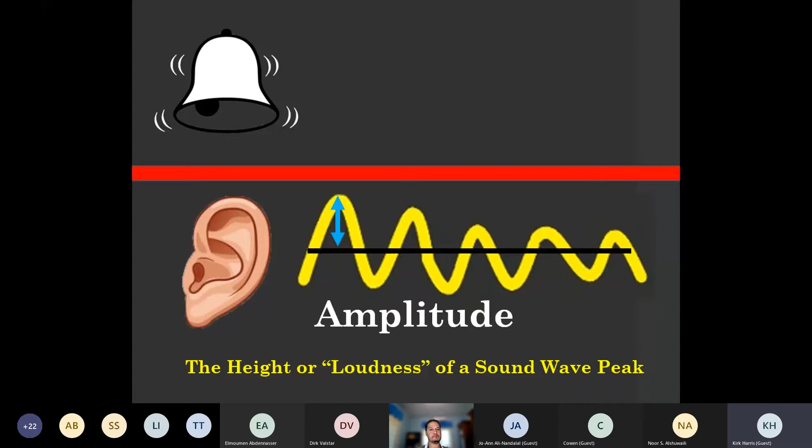It's electrical energy. When that sound wave comes back, it hits the transducer, also a piezoelectric transducer, and that compression creates electricity and sends it back to the truck up the wire line.

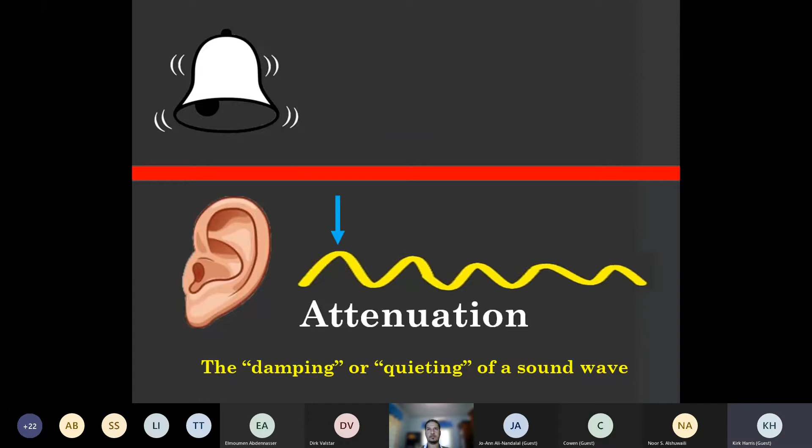We also have attenuation, which is the damping or the quieting of a sound wave as the sound gets not as loud. It's probably better shown like this. The sound wave goes out, and when it comes back, it's not as loud. The amplitude is lower. We can actually calculate attenuation of the distance and the differences between the amplitudes where they're measured. Attenuation is kind of the opposite of amplitude. It's how much an amplitude is lessened or quieted. So a loud or a large attenuation is small amplitude.

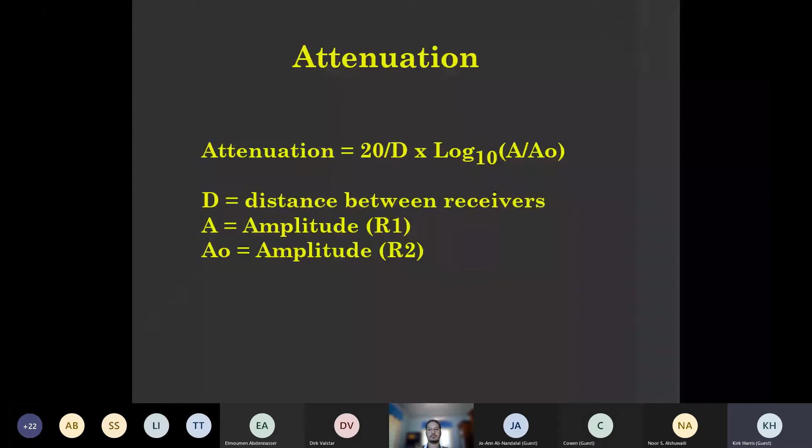The other thing we want to look at is resonance. Resonance is the lengthening of a sound wave, either reflection or echo or vibration or reverberation. It's when you keep hearing it. When I ring the bell, I hear a loud ring, but then I hear the trailing vibration of sound. That's resonance.

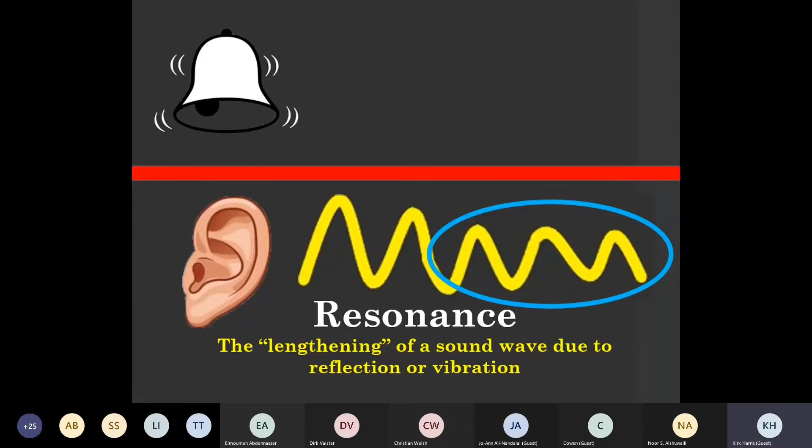We will not talk about the ultrasonic tool too much. We could spend days on all of the tools and on bond log interpretation. But the ultrasonic tool uses resonance very effectively to determine if we have a good cement job or not.

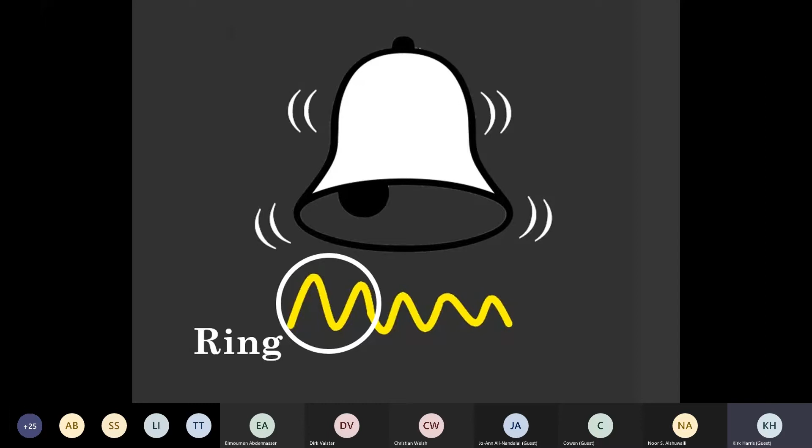So we have ring. You'll hear me talk about ring. If you go out to a rig site and you tap on the casing while it's sitting on the casing rack, you'll hear a ring. I mean, it's metal. You'll hit it and you'll hear a bit of a ring. Not like this glass I have here or a bell, but you'll hear a ring. And then we have the resonance. We have amplitude, the height of the wave, and we have attenuation, the damping of the wave.

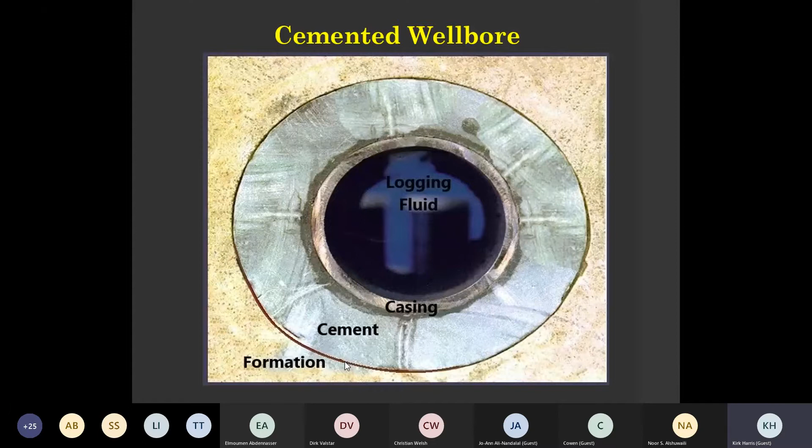So now it gets a little more complicated. We send the sound wave out, and we get a reflection off of the steel. It goes by Snell's law. When a sound wave or a light wave hits a boundary, the more alike those boundaries are, the more the wave will travel through. So two solids together, cement and steel, the sound wave travels through the steel into the cement. If there is no cement there and it's steel and water, a big difference in properties, then a lot of sound is reflected. And it's reflected down the casing. So what we receive is a very loud signal.

It gets worse than that for a cemented well. And this is what makes bond log interpretation so tricky. We send the sound wave out, we get reflections off of the steel, reflections off of the cement, reflections off of the formation. They all come down, they join together in a composite wave at the 3-foot and the 5-foot receiver. And now we get not just the formation signals, we get reflections and refractions and signals down the steel.

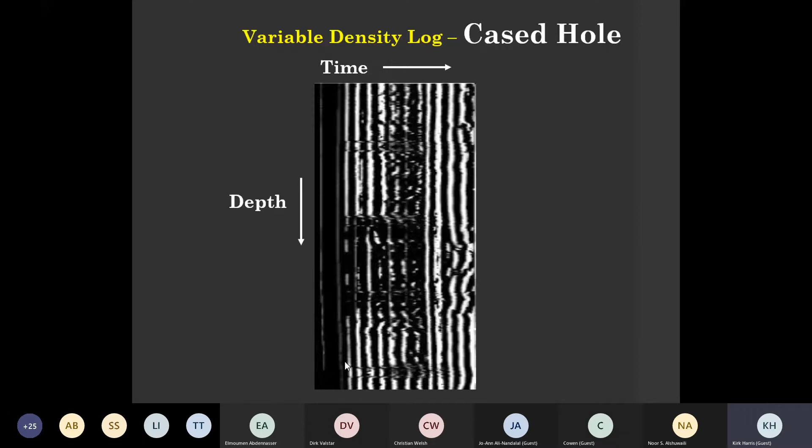And this is the log we get. We now get straight lines. Crooked lines were good. We were attached to the formation. Straight lines are bad. That means the energy did not go out. The energy is traveling down the steel. And if the energy is traveling down the steel, that means there wasn't a good solid outside that casing to send the sound wave out. Straight lines are bad. Crooked lines are good. Straight lines will distort crooked lines. They will cover, they will hide, and it makes it very difficult to see.

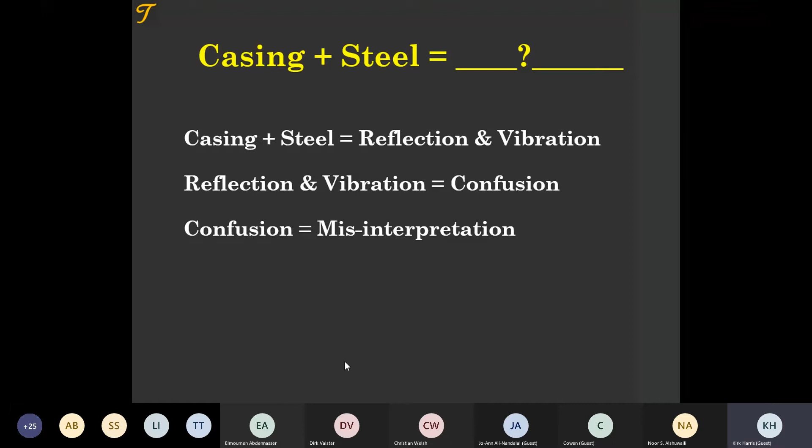This is my formula of cement plus steel. Cement plus steel equals reflections and vibrations. Reflections and vibrations equal confusion, especially a lot of straight line reflections. Confusion usually leads to misinterpretation. So the answer to the question is cement plus steel leads to misinterpretation. It is estimated that we misinterpret 50 to 80% of all of our bond logs. And I'm going to tell you, as we look at interpreting, I don't think we hardly ever interpret the bond log correctly when we have a marginal or a confusing log. It's very difficult, and I'll explain why in just a bit.

I was looking on LinkedIn today because I made a couple comments. A couple bond logs show up on LinkedIn, and everybody comments. And I made some comments that may be right or wrong, but I look at all the comments and there are a lot of opinions on how to read a bond log. And not everybody can be right because a lot of the opinions were very different. And so we're going to see a lot of misinterpretation if we don't have a method, if we don't have experience, if we don't have understanding.

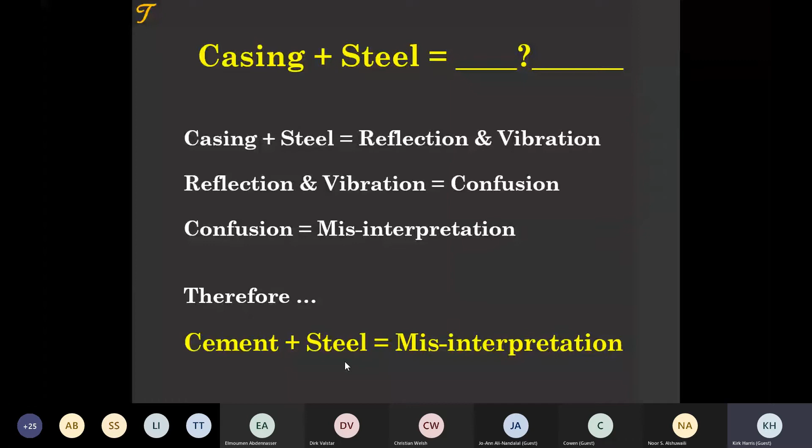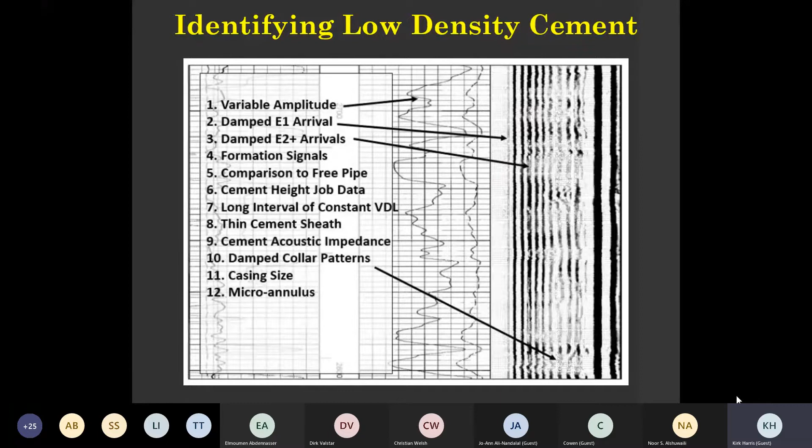I'm not going to show you much of this. This is a lightweight cement or a low density cement. Bond logs were made for normal cements. They were not made for some of the cements that we now pump. And so we see straight lines. That's bad. We see some crooked lines. That's good. We see some early attenuation, some late attenuation. That's good. It is hard to interpret lead cements sometimes. And I just put this up here to show that it's not always just a snap of the fingers and easy. There's a process that we go through and things we look for and things we consider when identifying low density cements. If we're doing a full training, we would go through 2 hours of how to interpret low density cements. But let's look at the basics.

This is the bond log. It has 5 curves. That's it. The first bond log I looked at, I thought it had 400 curves. That's what it looked like to me. This is very simple. You have to keep interpreting, but the log itself is simple. We send out a sound wave and we listen for it. The dark line is the gamma. It's just measuring the natural radiation of the wellbore. So it's giving us some formation changes, shales versus sands or limestones, for example. That dotted line right next to it, do you know what that dotted line is?

And we have many logs. This month I probably looked at 10, 15 different types of logs. So we get all sorts of different displays and logs, but this is the basic.

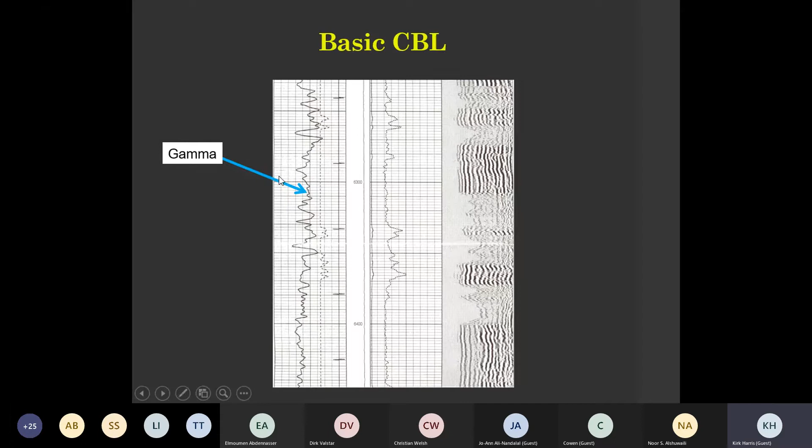This is the transit time. It should be straight. It's measuring the first wave that we hear at the 3-foot receiver. How long did it take to get there? And if it's traveling down the steel, steel is homogeneous. It's the same steel. It should always arrive at the same time if our tool is centralized and our fluid inside is the same, our steel is the same, our casing, that should be straight. We use that as a quality control.

We have our casing collar locator, which is basically a magnet picking up the massive steel at the collars, tells us joint to joint. Then we have the amplitude. In a slide or two, I'm going to tell you we do not use the amplitude to interpret. We can refer to it. It will help us, but we cannot just look at the amplitude and say good or bad. We have to do a little more work than that.

We have a saying at ThoroughBond, and that is, if you look at the amplitude for more than 5 seconds, you have to slap yourself. And you have to slap yourself hard enough that you'll remember slapping yourself, but you have to slap yourself hard enough to look at the VDL.

Now, the amplitude is the height of the wave of the first arrival. That would be a first arrival over here, but it's the first arrival that occurred at this point, and we measure it in millivolts, usually 0 to 100. This is very low. And so we have an amplified amplitude, which is 0 to 10. Same curves, just different scale. The VDL, if we were to pick up this amplitude, would be the arrival that comes in first, right here. But our amplitude on this log is so low, you don't even see it. It's a straight line that you can't even see.

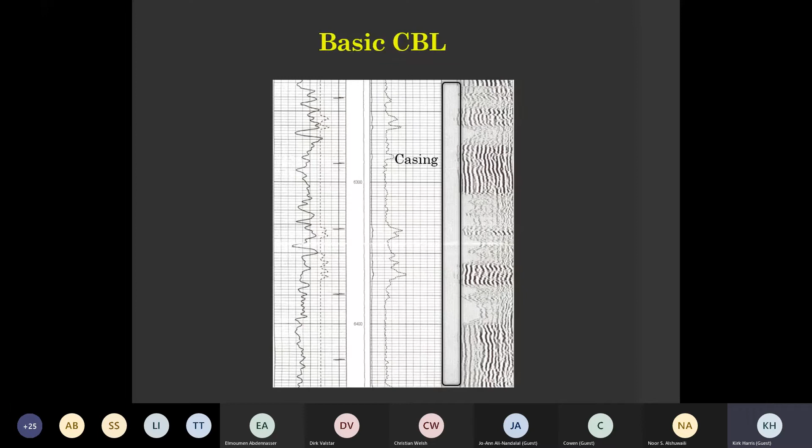And then we have the VDL. That is the formation. The VDL is made up of arrivals coming down the casing. That's those straight lines. First thing we hear, sound traveling down the casing. That's the casing ring. We have the formation arrivals. The formation arrivals are those crooked lines as we go from fast to slow formation here. At the end, we can pick up the fluid arrivals. Fluid arrivals are traveling on the inside of the casing next to the logging tool. It's going through a slow fluid since sound travels through fluids slower than the solids. But sometimes they'll show up and confuse us or distort the picture.

Do not use amplitude to interpret the CBL. I can say this now. I'll say this one just to be a little controversial. I don't mean to sound mean here, but there are 2 people who do not interpret logs very well. I could say 3 people, but for your oil company, you have someone who is probably the cement bond log interpreter. And I don't know their background, but cementers usually don't interpret the CBL. I wish they did. And when they do, I know some, I think they're very good at it. But often we don't get involved. We leave that to logging. There are some logging engineers who can interpret. They're practical logging engineers. They understand that there are limitations to their tool and they know how to interpret.

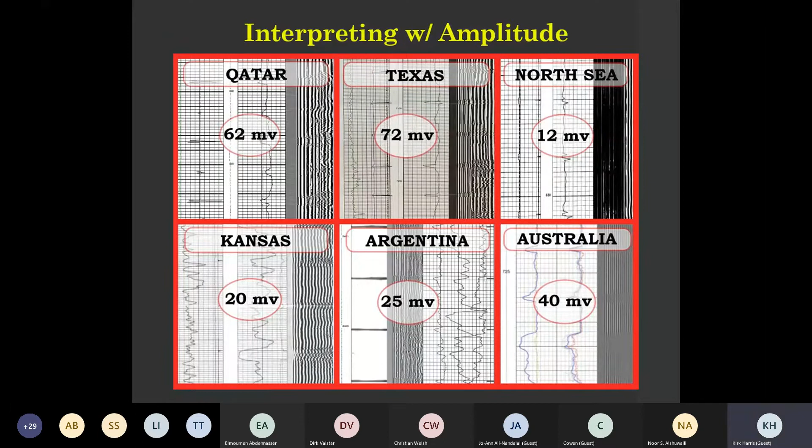Here are our 5 main things that we see when we run a bond log. Again, we have the gamma, transit time, casing collar locator, amplitude, and VDL. I know there's probably a delay, so my cursor is probably just arriving at the VDL. I apologize.

But when we look at the VDL and even the amplitude is uniform. The amplitude, in this case, 13 5/8 inch, is free pipe amplitude. On the VDL, big straight lines. The collars start at 5 feet apart, the distance between transmitter and 5-foot receiver, and span out, big ringing collars. Clearly no cement here. We have good cement, no straight lines. A picture of an open hole log. We're so tightly bonded in such a good cement job.

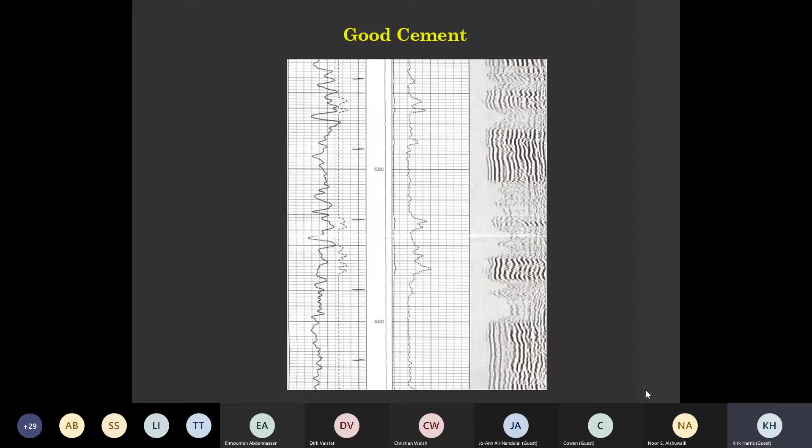And then we have what confuses us. We have straight lines, we have ringing collars, but we have formation signals. And when we perforate, we can communicate. We have cement here. Is it a channel? Is it poor bond? That's what we have to understand. The only thing I will say about the bond log is that it is hard to see channels. If this is a channel, it's hard to see or tell that it is.

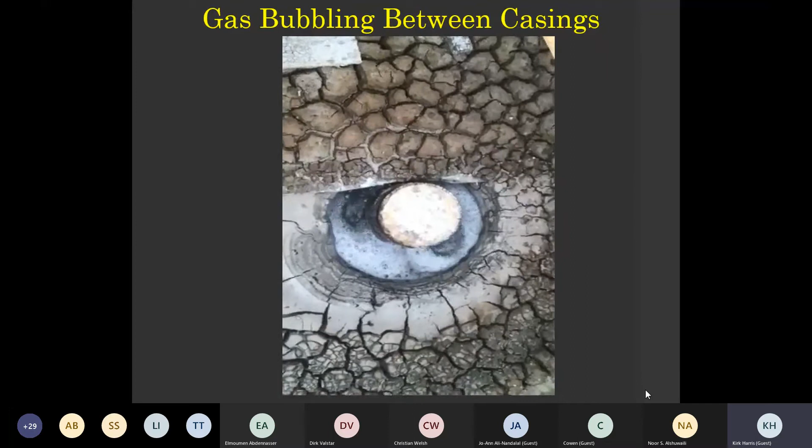For that purpose, we use the ultrasonic tool. Here you see a well. This is a well that I was involved in. We are bubbling gas to surface through a channel. It's a channel that we would never see with a bond log. So we run the ultrasonic log. To me, the best tool for bond log interpreting, for bond log to determine isolation, is the ultrasonic tool.

And here you can see little rivers. Here's a little river, little bends in the river. Oh, look at this. That is classic. And that's on this well we just saw. That's what our bubbles are percolating through. We were able to actually perforate this and squeeze it and shut off that gas on this well. That's a well in Texas.

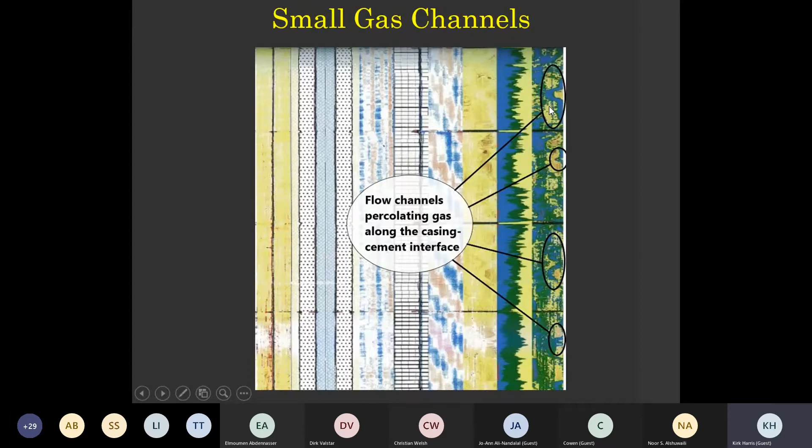Okay, we've got a few minutes and we don't even know how I interpret logs yet. So let's interpret. What do you need to succeed in bond log interpretation? How do you do it?

I interpret on average about 1 log per week. I've been a little under the weather, so I've got a few logs sitting right on my desk. I'll probably wait till tomorrow to start interpreting those logs.

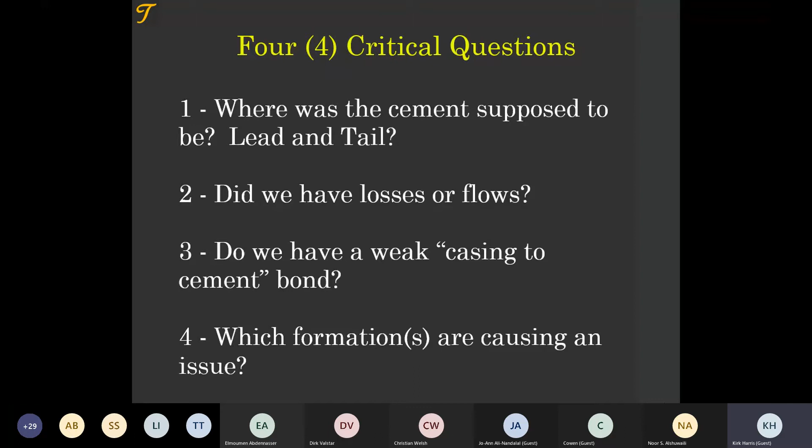And then finally, which formation is causing the problem? Formations affect this log a lot; it helps us or it hurts us. So which formations? And then we interpret. Those 4 questions are beginning to build the well. They're getting us to focus on cementing. And that's what we have to do.

When we interpret at ThoroughBond, we call it the 5 C's. We construct the well. We just started constructing the well by asking the questions. We compare. The bond log is relative. As we will see, this is different than this. I may not know anything about bond logs, but I can tell you this is different than this. And we compare up and down. We love to compare the free pipe, where we know there is no cement, to the rest of the log.

We then correlate. We then consider. Oh, do we consider? The entire time we are interpreting, we are thinking, what could be going on? I know all of the things that can go on. What's going on in this well? What's the story of this well? And then we conclude. The reason I say we don't interpret logs very well, unless we put a team together, is often when we conclude, we say good or bad. When we conclude, we say, here's what happened. This is the why to the good or bad.

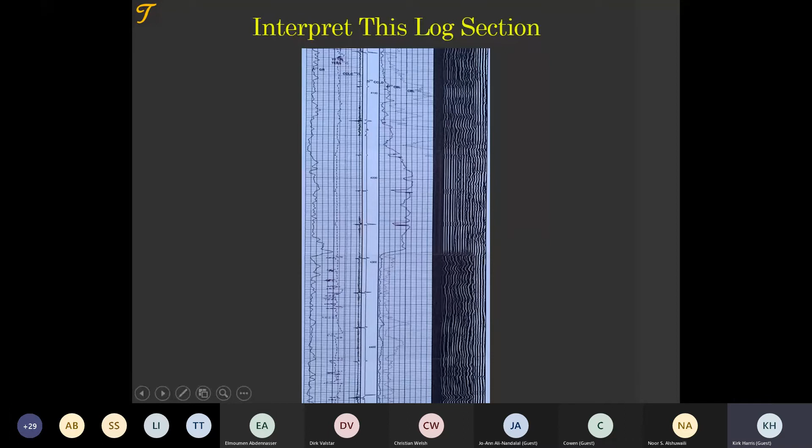So let's interpret a log as we close in the next 10, 15 minutes. I'll remind you, for the new interpreter, straight lines are bad, crooked lines are good. High amplitude is bad. I'm not saying it's good, we just don't bank on it. Low amplitude is good. So here we interpret this log. The first thing we do is make sure we know what we're looking at. Here's our gamma ray. Our amplitude is over here. Variable density log, that's where I'm going to observe.

The number 1 skill you can have as an interpreter is to have the patience to be able to relax and observe. Observation is the number 1 skill. I'm not sure I'm a great observer, but I know some who are, but I will take a log and I will sit in the room with it for a half hour to an hour and I'll just look at it. Drink coffee, relax. It's the best part of my days sometimes, drinking coffee and just staring at a bond log. I think it's good for your mental health too, to just stare at curved lines.

We have our transit time. We have our casing collar locator. 5 curves. That's all you have to know.

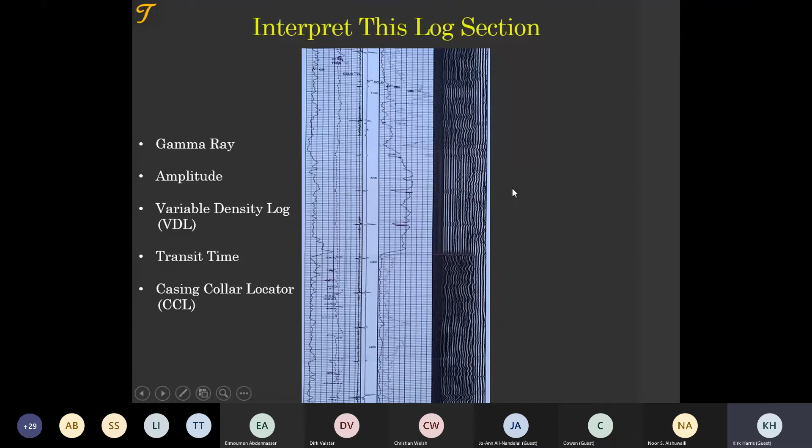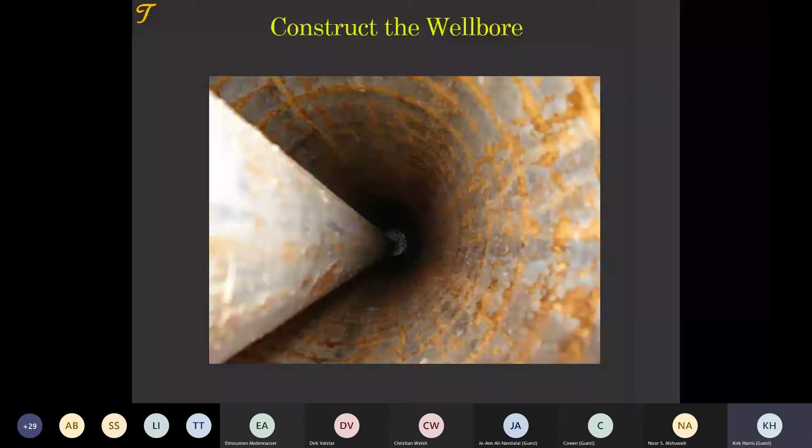We construct the wellbore. We want to know where the cement was supposed to be. We kind of want to know the volumes, lift pressures. We can look at the cementing chart. I'm going to warn you, sometimes you have none of this data. I look at old logs where all we know is that maybe cement was pumped.

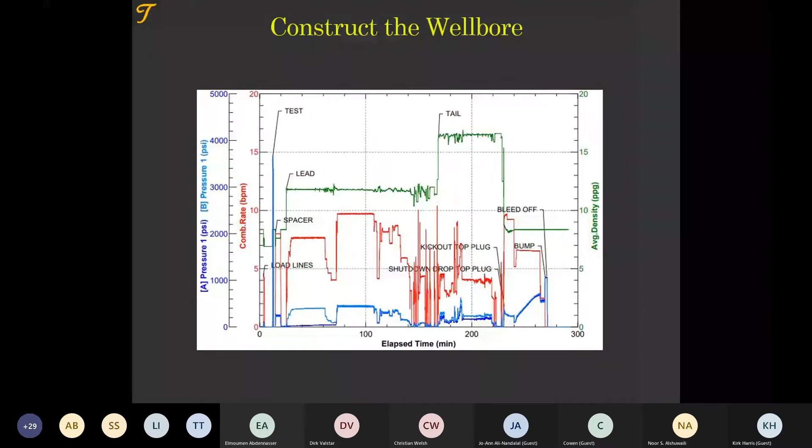But in new wells, in what you're doing, understanding the wellbore, where the top of cement is, how the job went, the more information I have, the better. Did I get returns? What were my slurries that I was pumping? What was my casing size?

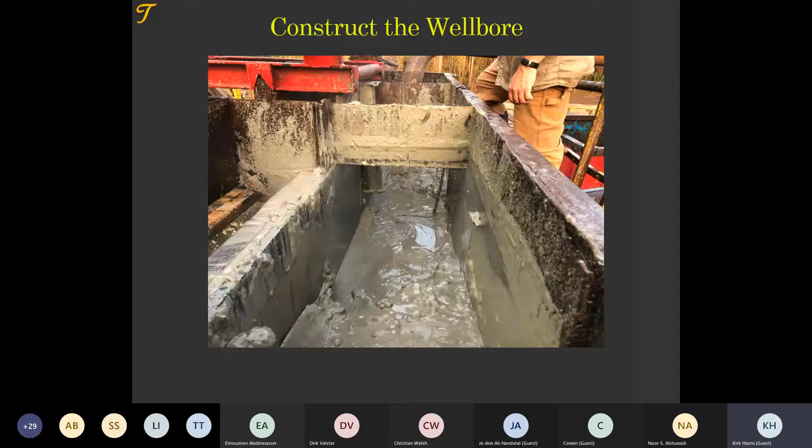We construct the wellbore. When we construct this wellbore, we find out that this is all good tail cement, strong cement. When I say tail cement, sometimes we pump a lead that is lightweight and we finish with a tail that is strong across the productive interval. And so all of this is good cement. It's all the same casing, old 5.5-inch casing, good strong cement.

I build the wellbore, I start learning about my formations. I'll talk about that in a little bit. And so I construct my wellbore. I'm wondering, if this is all tail cement, what's going on? Something's changed and I've got to figure it out. So my next step is to compare the log sections.

Comparing and then correlating takes observation. We look up and down to compare. We look side to side to correlate. You've got to be patient. If you're really smart, this is tough for you because you're thinking and not just looking. You have to be a little bit brain dead to observe, but at the same time, you have to be thinking to correlate and then definitely to reason what's going on.

But sometimes we want to interpret by thinking instead of observing. And the more you observe, you'll see some incredible things. I'll show you one on this log. We don't have time to observe right now because if we were, I'd say get a cup of coffee and spend 30 minutes, and we don't have that extra time. So I will not have you observe on demand, but you can see this. It's good, bad, and good. And that's all we're doing.

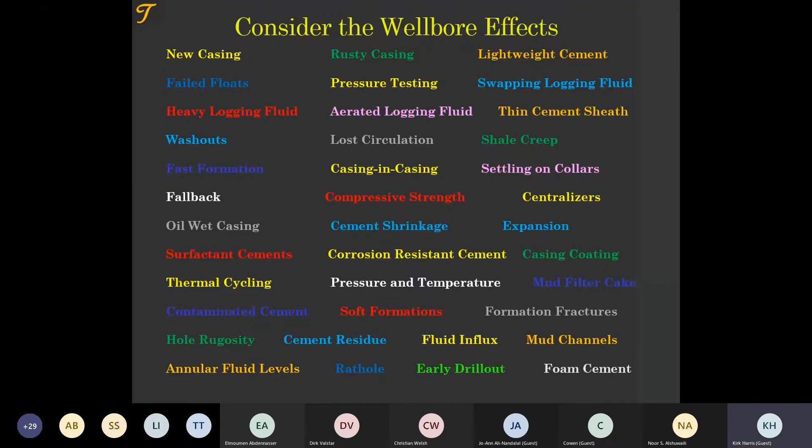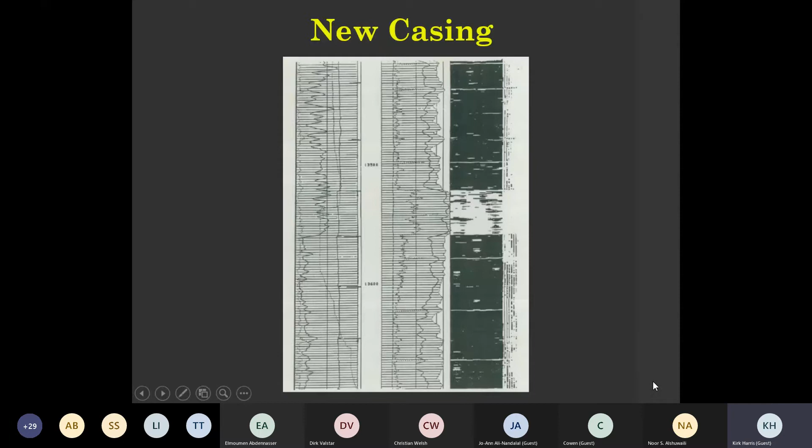Many major oil companies will either pressure test when the plug bumps and the cement is wet, where we just placed it in the annulus, or they'll run the pressure test after the bond log. So those are just 2 considerations of 38 that we're thinking about. In general, the logging engineer is not thinking about that. He's not thinking about the wellbore.

He's thinking, what are these sound waves? Are they good sound waves, valid sound waves? Is my tool right? I'm thinking sound waves, and we're trying to kind of use our imagination. I call it science-based imagination, that's kind of the technology we do. When we see sound waves, we're thinking wellbore and what's going on.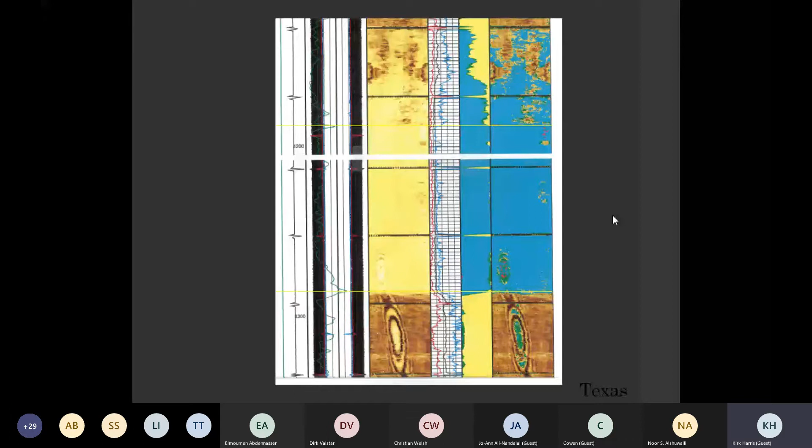Once you get a correlation, it's pretty simple. You then go to this guy. I don't know if you've ever met him. Every company has one. This is our geologist. If you do not have a geologist friend, you need to get one, because the formation affects us in so many ways. The geologist is a critical position. I go to the geologist again and again to understand what's going on in the well. And I did so here as well.

And what I found out, this correlation was a hot dolomite. That led me to the next step. What's that hot dolomite doing? We find out it's 200 PSI overpressured. They didn't close in an injector, and it looks like we have CO2 crossflow occurring to the other dolomite up here, which wipes out the area that we want to inject into. Now, I've not only gone from good to bad, I think I know what's happened. So we perforated here, and we circulated cement and fixed this well.

Hard to do, but here's the most important thing of this interpretation. This was the first of several infill wells, and now well one, we know it was a crossflow. We know we successfully squeezed it. So we put a packer in on the next well, and look at the perfect cement job, no straight lines. We can even see a fracture here through the VDL.

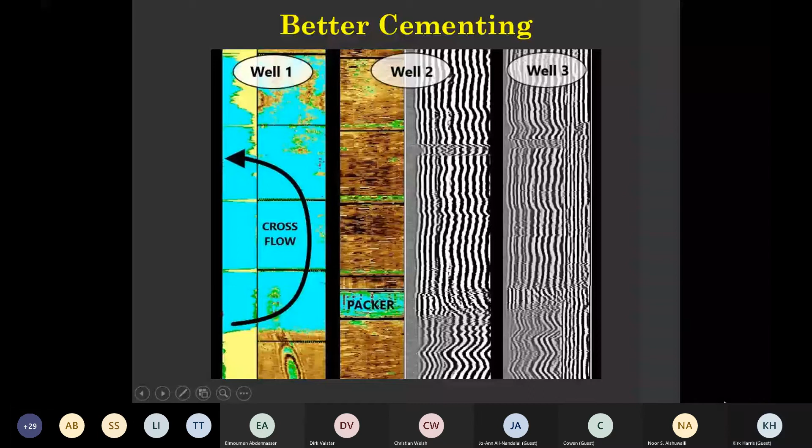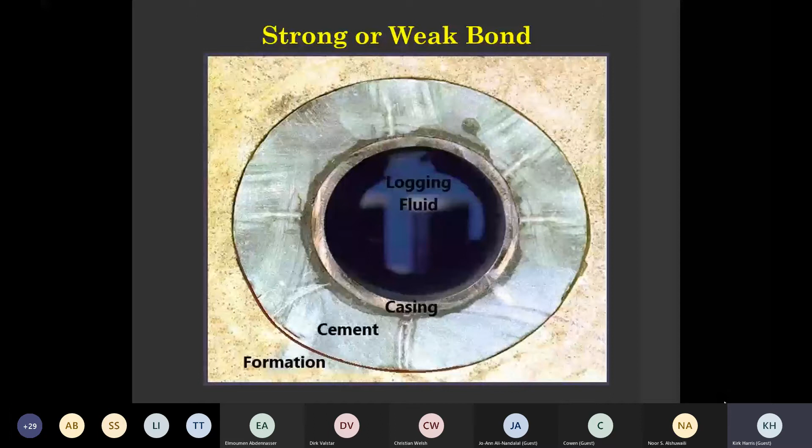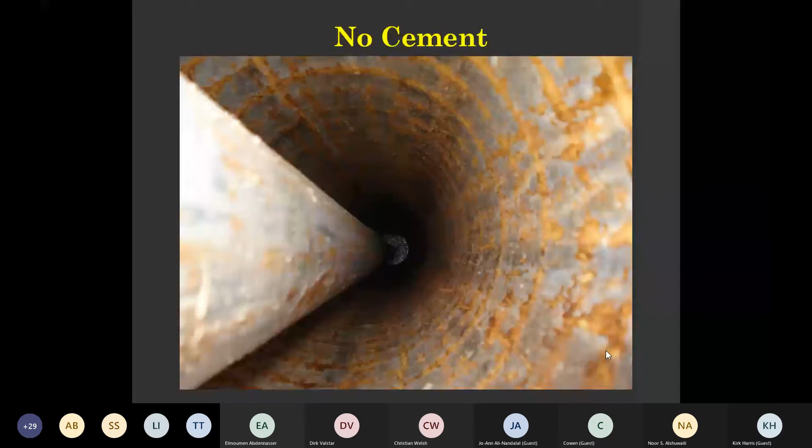When we conclude, we only have 3 choices. Here's another easy thing. When we concluded there, it was either a strong or weak bond, a good cement job, or if it's bad, it could have been a weak bond, or we had a channel. This was cut out of a well. Or we had a channel, or we have no cement. The final conclusion in wellbore construction is you either have good bond or a weak bond or a channel or no cement. That becomes your conclusions, but it's important to know why there's channeling, why there's no cement. That's part of the game.

In this case, it was a crossflow. The more you observe, the more you see this crossflow occurring on this line here, right back into this fracture. CO2 crossflow disturbing the cement up here. They're very useful. Let's summarize. This is the test.

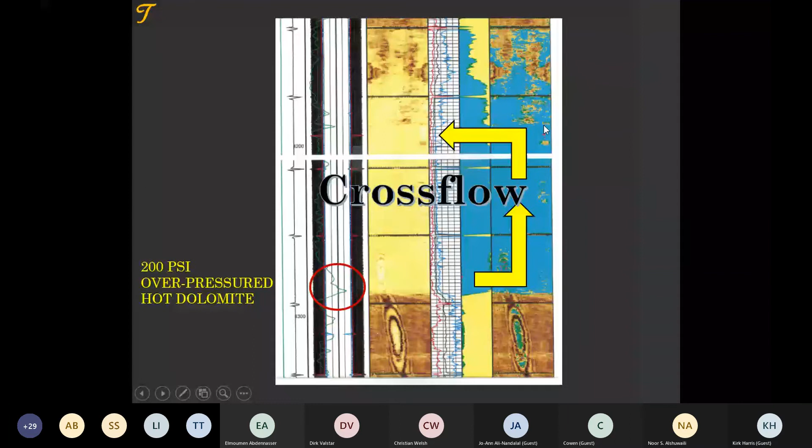Number 1 is what? You can say it out loud. Even if I can't hear you, your spouse can hear you. So you need to have your spouse learning as well. You can give him or her the answer. But number 1 is the gamma. What is number 2? That is the transit time. Number 3 is the casing collar.

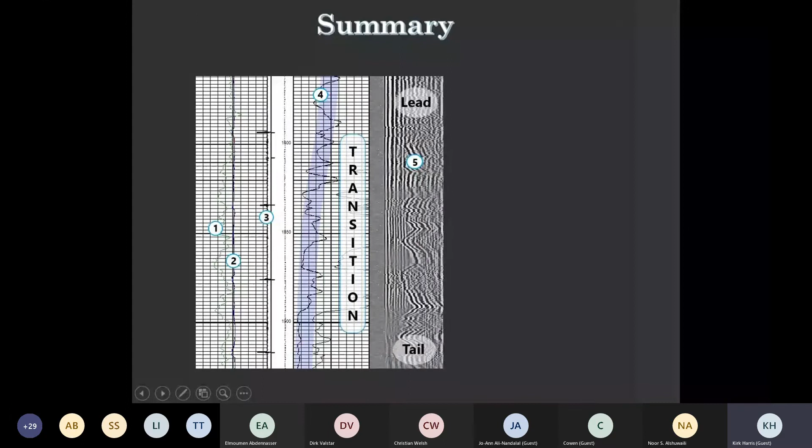Number 4, in a classic transition from tail cement to lead cement, as the cement intermixes, is the amplitude. And what we look at to interpret, and we've only touched the tip of a huge iceberg, is the VDL. The gamma ray, the transit time, CCL, amplitude, and variable density log. What is amplitude? What is amplitude if you were to define it for somebody? It's the height of the wave. Oops. It's the height of the wave.

What is attenuation? What is resonance? Steel plus cement equals what? Can someone yell out, just so I'll know you're there? What is the #1 bond log interpretation skill? Anybody, tell me. If you get it wrong, I'll just say it's an interesting answer. So don't worry about being wrong. Observation. Okay. Observation. Those are not interesting answers, but those are correct answers. It is observation.

As a young professional, be blank and blank. Now that I know you're there, you can answer those. What are the 2 things I'm asking you to be? Humble and courageous. There's nothing more beautiful than a humble, courageous person. I'm not saying I'm humble and courageous, but when you see someone who is humble and courageous, we do that with bond logs by asking questions respectfully. If you're humble, you usually don't say a logging engineer can't interpret. So see, I'm not humble.

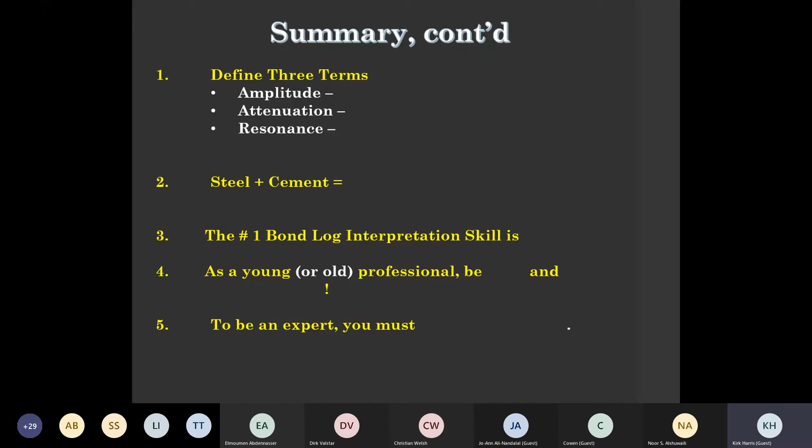And you're going to hear a lot of opinions. You're going to see a lot of misinterpretations. Be a little skeptical, in your courage and humility. Be a little skeptical, but keep looking, keep learning. And if you're guided down that path, this is a needed skill. You can be an expert. Practice every day.